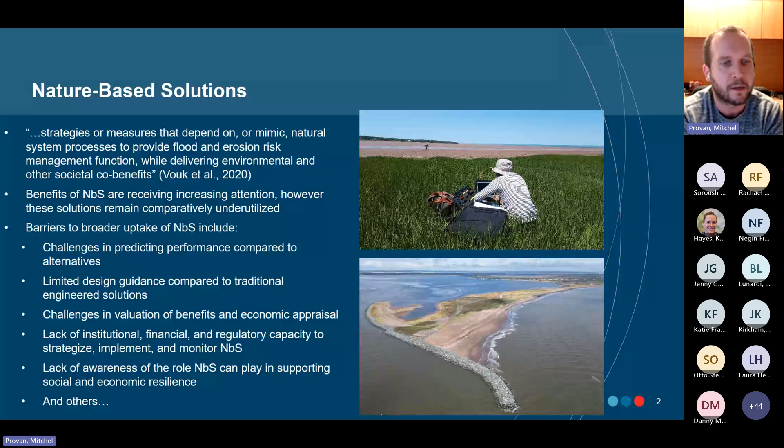Also, a lack of awareness of the role nature-based solutions can play in supporting social and economic resilience, and others. Where physical modeling can help is these first two. Physical modeling can help with these challenges of predicting the performance, as well as the limited design guidance compared to more traditional solutions.

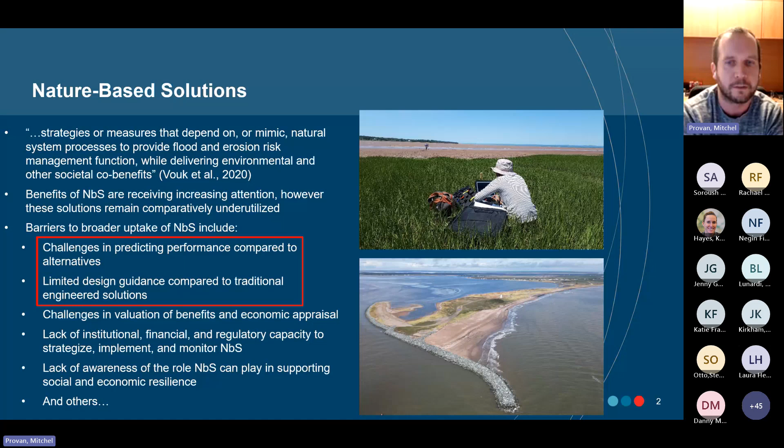Physical modeling, for anyone who may not be aware, is a tool that we use to simulate the behavior of water in order to study hydraulic processes and interactions in a controlled environment. This is typically done through scaled model representations of the system that's being modeled. However, some models are also conducted at full scale in certain circumstances.

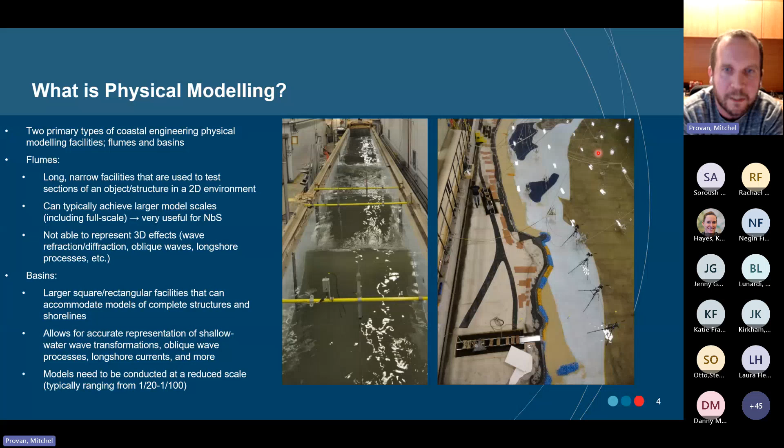Basins, which you can see just a portion of one pictured on the right here, are larger square or rectangular facilities that can accommodate models of complete structures and shorelines. It allows for accurate representation of the shallow water wave transformations, oblique wave processes, and longshore currents. However, the models typically need to be conducted at a reduced scale, which ranges from about 1 in 20 to 1 in 100. So just to make sure everyone's on the same page, when I talk about a model scale of 1 in 20, that means all lengths in the scale are reduced by a factor of 20.

So physical modeling as a tool to study. Since the modeling is conducted in a controlled environment, it's a great way to study and understand the performance and behavior of a variety of nature-based solutions. Hydraulic conditions, such as the water levels and waves, can be easily changed in a model, and the performance of the nature-based solution being tested can be studied under a variety of conditions. Extreme events can be generated, and models can be tested to failure at no financial risk.

In a physical model, you typically want to test to failure as you find the upper bound of the ability of whatever is being studied. Whereas, if you construct something in the field, even as a pilot study, you really don't want failure as it can be quite expensive to rebuild or repair.

And it's also much easier to measure data in a physical model and change the measurement locations based on observations. It's very quick to change the location of your instrumentation in the model, and you can do it in between tests and rerun the same test if you see you're not capturing that data. Whereas in the field, it's very difficult, if not impossible, to change the location of instrumentation during a large storm event because you don't want to be out there in the water during a large event.

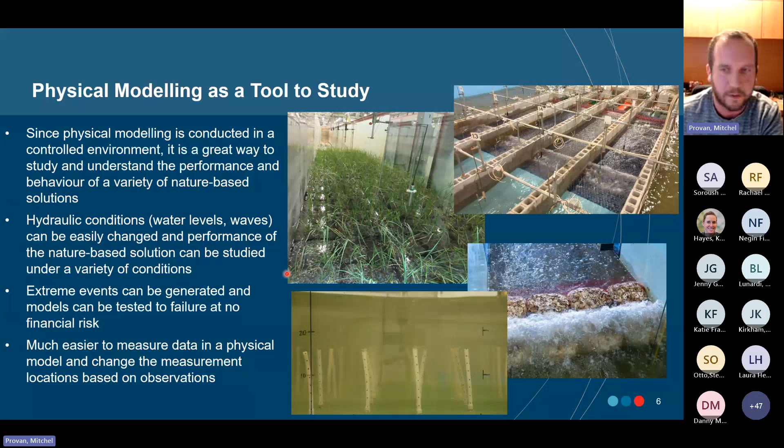So an example of using physical modeling as a tool to study is a study that we did here using coastal vegetation. Living shorelines are the most recommended nature-based solution strategy for low to moderate wave energy settings. They can help reduce the risk of flood and erosion in coastal areas through both increased bed elevations as well as providing resistance against wave propagation.

Now, there's been a lot of experimental studies done on coastal vegetation. However, the majority of these studies have focused on the wave attenuation abilities of mature and dense vegetation. There's a knowledge gap on the ability of immature or low density marshes during the earlier stage of marsh restoration or construction to attenuate wave energy.

And so we conducted a series of full-scale flume tests using live plant specimens that are native to the Atlantic Ocean here in Canada, but the similar study methodology can be carried out, and we have plans to carry it out for other plant species.

Just down here is just a sketch of the testing setup. So the waves approach from left to right. We installed a 1 in 11 grade here, and then a flat floor out in front. We had our experimental marsh, our model marsh, installed in here with a number of wave measurement locations throughout to investigate the wave attenuation as the waves propagate through the model marsh.

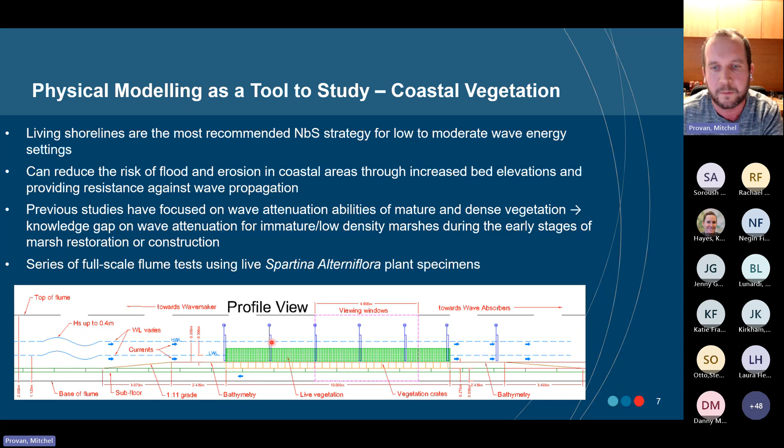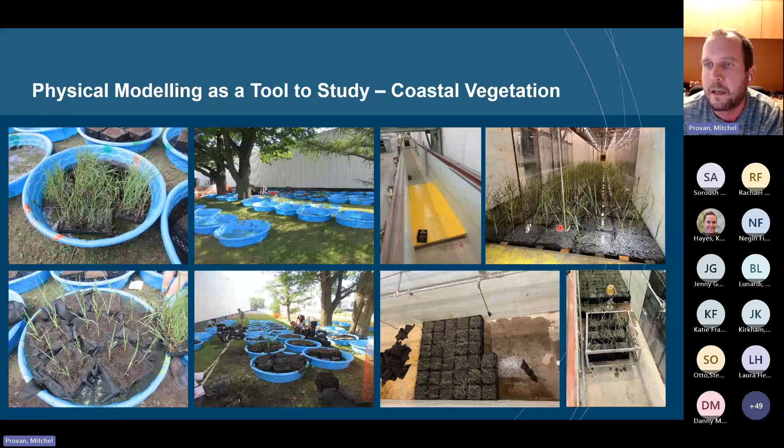You can see we also put a fine layer of gravel on top of the soil in the plants in order to reduce or mitigate the chance of erosion happening during the test, just to keep everything the same from test to test.

As I mentioned, two plant densities were studied. The lower density was 36 stems per meter squared, and the higher density was 81 stems per meter squared. We tested both regular and irregular wave conditions with wave heights ranging from 10 to 30 centimeters, peak wave periods ranging from 2.25 to 3.25 seconds, and water depths of 30, 60, and 90 centimeters.

We also investigated the interaction of waves and currents and the ability of the plants to attenuate wave energy. And so we tested with currents at 0.25 and 0.5 meters per second. Just a little video clip, nice clip showing the vegetation moving underneath the wave action, and just a few other photographs of the test in progress.

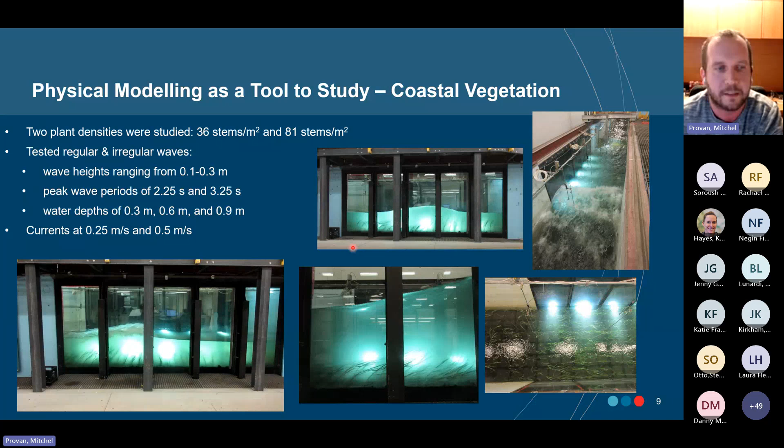I'm not going to go into a deep dive into the details of the results because there's just not enough time for it. So if you're interested, my colleagues did publish a paper that has a more detailed explanation of the results and the findings of this physical model.

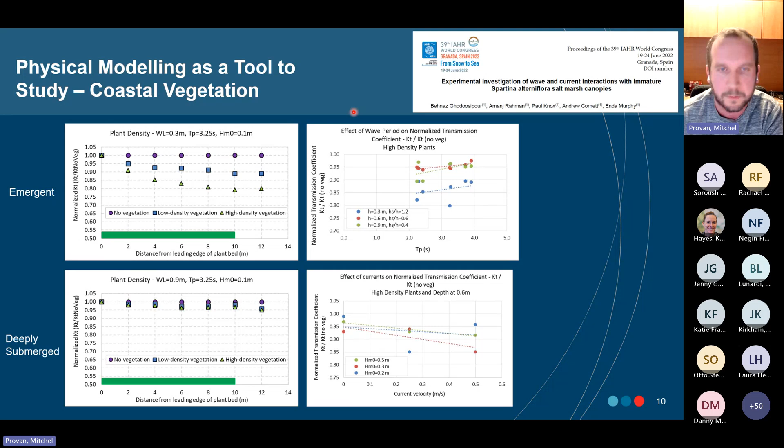So looking at physical modeling as a tool to optimize. Experimental tests or physical modeling allows for changes to the design of a shoreline protection scheme or any sort of structure, including layout, size, type of protection, among other factors. You can make these changes relatively easily. Now, the interaction of waves with the coastal structure is a very complex process and can be difficult to accurately model numerically, and design equations may not provide an optimized solution.

So, classic engineering design equations are usually based off of physical model tests, the majority of them, but they're more for general cases. Once you start designing structures in coastal environments, certain details in the bathymetry and the interactions of the waves with the shoreline and other structures can all change the optimum solution that can be found through design equations. It also provides the opportunity to reduce structure armor size and extent, and this allows us to find construction cost reductions and/or incorporate more nature-based solutions into the design.

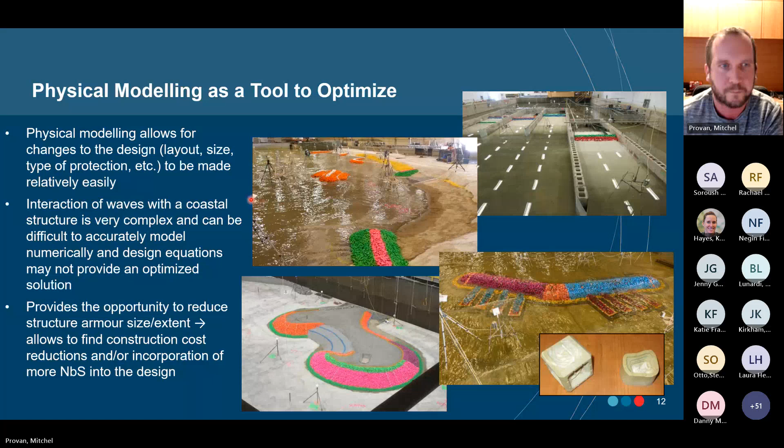So an example of using physical modeling as a tool to optimize that we've done is for the Jim Tovey Lakeview Conservation Area, which is a shoreline of eastern Mississauga on Lake Ontario, and it had a degraded quality of terrestrial and aquatic habitat due to current and past land use.

The goal of the larger project that we conducted the physical modeling study for was to create a new natural park that both established ecological habitat and public linkages, as well as an innovative use of clean fill from regional infrastructure projects. I just wanted to note this was a joint project from the Credit Valley Conservation, the Region of Peel, and the Toronto and Region Conservation Authority.

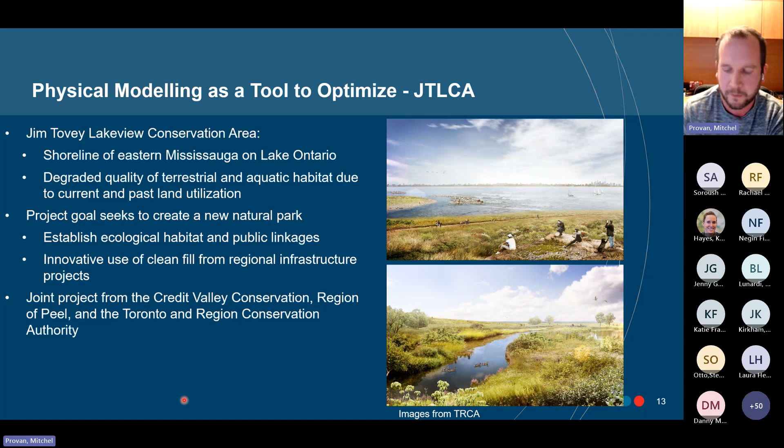There were 5 alternative designs, 4 of which included the headland bay configurations that you see here. The preferred alternative that we tested and helped optimize in the physical modeling study was called Island Beach C, and you can see a schematic of it here.

This alternative included about 1.5 million cubic meters of fill, a headland with an armor stone revetment around it, which is outlined in red, about 1 kilometer of cobble beaches, which you can see in yellow here, 3 offshore islands with the blue arrows on them, a terminal groin at the end to anchor that cobble beach, as well as 2 creek outlets with the green arrows here.

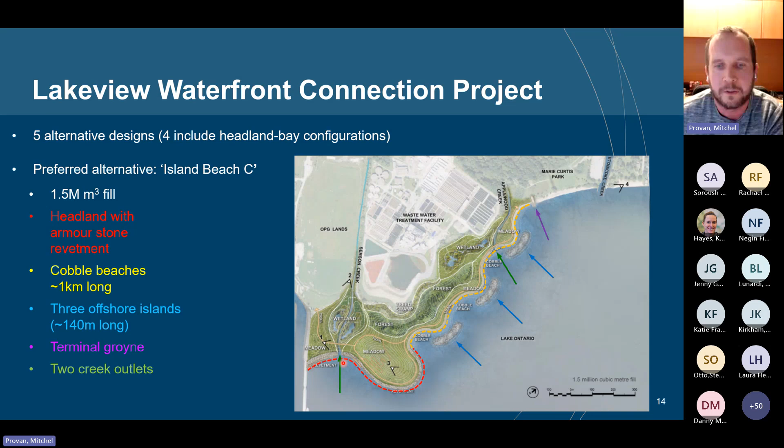In order to support the design of this, a 1 to 35 scale physical model was conducted in NRC's large area basin. I just want to note that this was done in partnership with Shore Plan Engineering, who are the design engineers for this project. The physical model was used to verify the stability and response of the headland beach system under a range of wave conditions, as well as optimize the project design elements, including the beach fill and rubble mound structures.

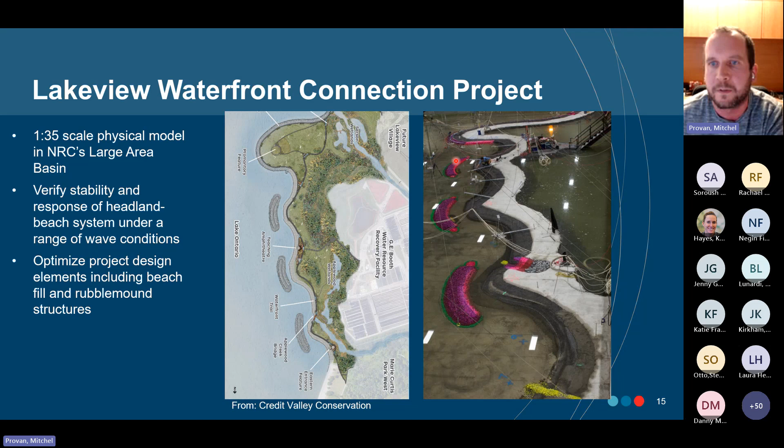I have a schematic of the shoreline here, and you can see a similar view from the physical model matching up nicely with the schematic. These are a number of photos from getting the physical model built. We typically represent all the bathymetries out of concrete, because it gives us a hard, stable surface that remains unchanged in between tests, so you can directly compare one test to another. So we have our technicians working hard, placing the concrete and then finishing it.

This is the wave calibration. Prior to any physical modeling study, before you actually start building the structures and testing them, you do a series of wave calibrations where you make sure that your wave machine is producing the waves that you want. That's done before any of the coastal structures are constructed. Here's the technicians building that long cobble beach along here, finishing it off, and then building these more offshore rubble mound structures, as well as the revetment.

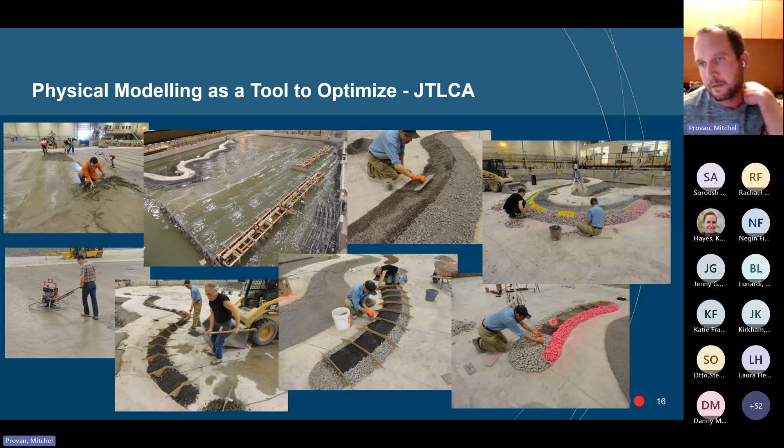One thing that we try to do in the physical model is to replicate as closely as we can the construction methods behind the offshore structures to ensure that the interlocking between stones is similar between the model and real life. So things like the cobble revetment are all shovel placed, because in the real world you have a big excavator or backhoe placing that material. All the actual armor stone is hand placed stone by stone. We don't just shovel it into place. We place it one stone at a time to get similar interlocking to what you would see when it's constructed in the real world.

Just a few photos from before, during and after testing. Again, I won't get into the specific results here, but there is a paper published by my colleague Scott Baker with the information up here in the top right. Over here is a nice shot of the waves interacting with the shoreline scheme with the various islands and the different beach cells. The physical model was used to investigate its performance and provide some ability to optimize it.

This is at the end of one of the revetments. You can see a bit of a scour hole forming here. That was altered in the next design step and retested to ensure that something could be done to eliminate that scour hole. We looked at erosion and deposition trends of the cobble beach, making sure it's eroding where the designers want it to erode and accreting where they wanted it to, the reshaping of the cobble beach and the profile that it takes on, and the interaction of the waves with these more offshore rubble mound structures.

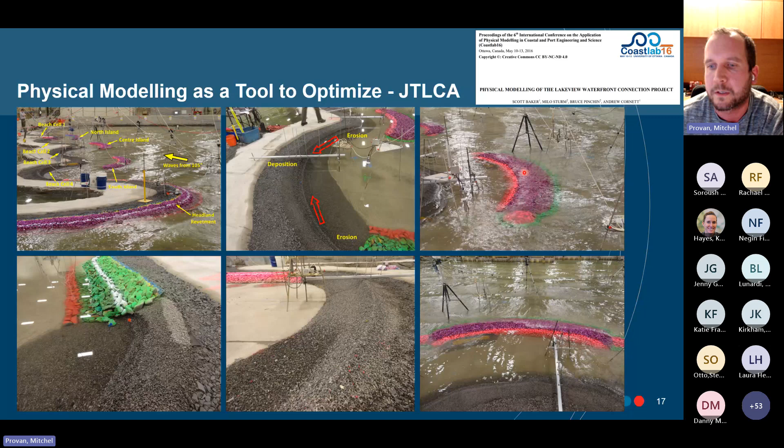The study itself generated a large quantity of data used by the design engineers to further optimize and finalize the design plans. And then optimizations were achieved through the physical modeling study, and they led to significant cost savings for the overall project. Compared to the EA cost assessment, there's savings of approximately $3 million, which is more than 10 times the physical model study cost.

So while physical modeling can be fairly expensive to undertake for a project, it can definitely pay for itself many times over through optimizations. This is my colleague Scott Baker working on the model here. This was a study that he was running. I believe a lot of the cost optimizations came through a reduction in the crest elevation of these structures, allowing to use less material, and then leading to some of those cost savings.

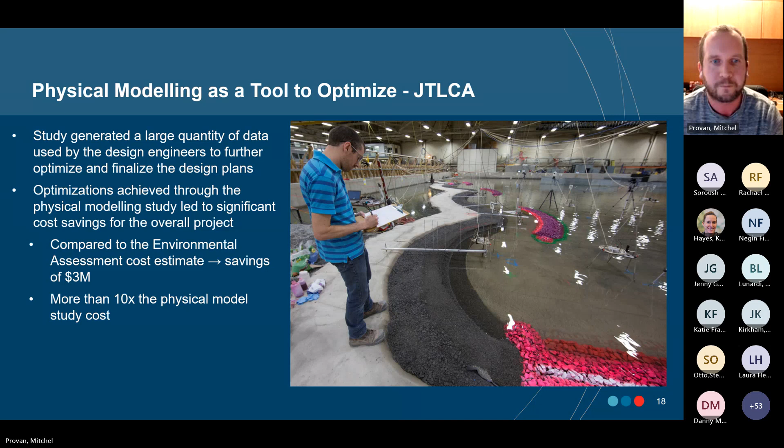Another example, and this one's not yet happened, so I don't have any nice model pictures to show from this one, but this is for the Hillman Marsh on Lake Erie. This is an upcoming model study we'll have starting next spring. So we're excited to undertake this one with Seth Logan at SJL Engineering.

The Hillman Marsh is located on the eastern side of Pelee Peninsula, and it's a provincially significant wetland. It's historically featured a protective barrier beach over 1.5 kilometers long, which would shield the marsh from the potentially large waves of Lake Erie. A breach occurred in 2017. Here's an aerial photograph from 2017. You can see that breach here in the barrier island.

And it rapidly expanded in the following years due to high lake water levels, increased wave exposure due to vertical downcutting, and obstructions to the natural longshore sediment transport. So you can see that breach initially formed 2017. 2 years later, it's widened. Another year, it's really broken open.

And by 2022, you have a large breach in the island, this big sand spit that's developed and starting to encroach in the wetland behind it. And it could potentially cause a lot of issues with wave-induced flooding to the lands inside that marsh if it's fully exposed to the potentially large waves of Lake Erie.

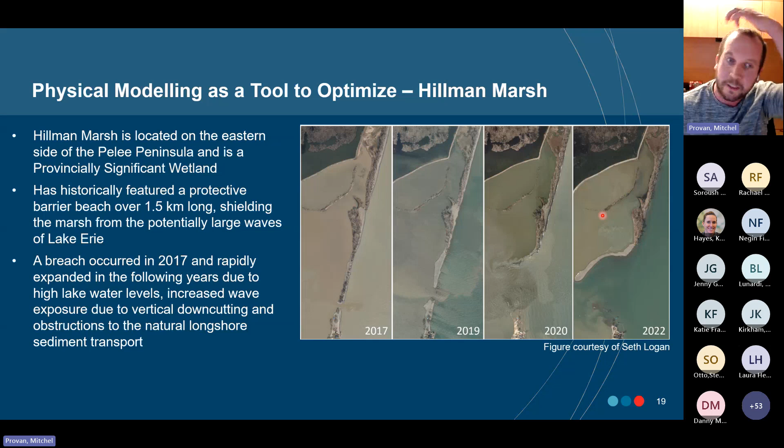So the design work is currently underway with preliminary designs, including a gray-green approach with a combination of new barrier beach, buried rock berms, submerged rock shoals, and new fish habitat. This is just a schematic provided by Seth Logan. And this isn't the final design. This is just a preliminary design to show some concepts that could be included in the overall

rehabilitation project. And we'll be looking to test once the designs are further along and ready. We'll be ready to test it in spring 2025 to support the optimization of the coastal features and confirm that the final design will deliver the desired levels of performance.

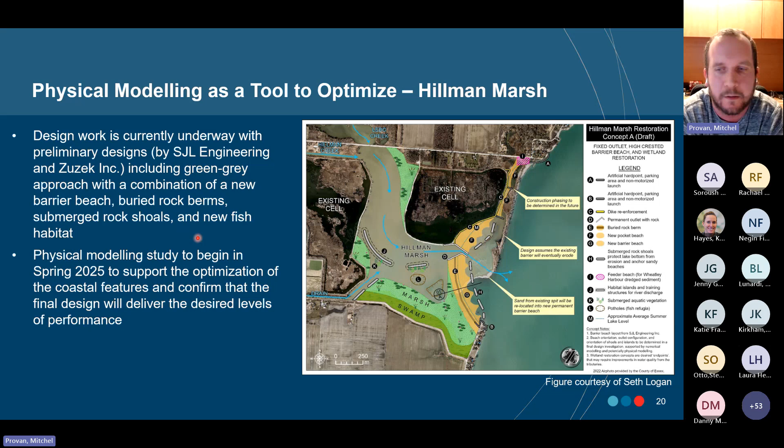And the third one here, using physical modeling as a tool to de-risk. Physical modeling provides the opportunity to reduce project risk before construction. It allows to investigate the stability of various design elements and protection of critical infrastructure, and can also, in some circumstances, investigate potential maintenance-related issues and reduce the risk of expensive future maintenance of a coastal infrastructure project.

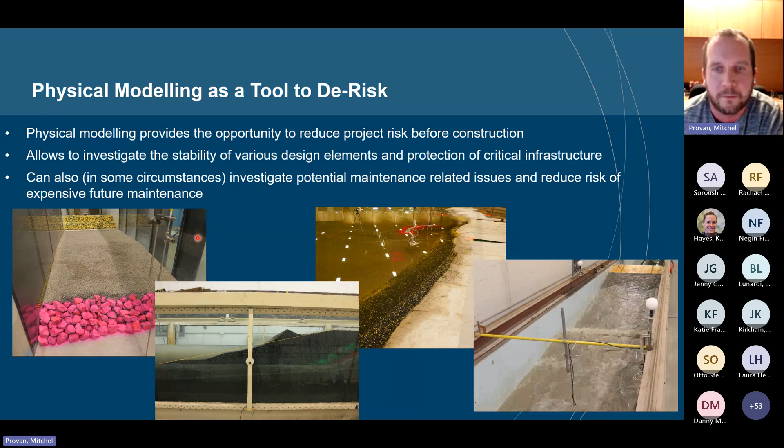So one example of that here is the Morgan Shoal dynamic revetment. Historically high water levels on Lake Michigan in 2020 resulted in wave-induced damage and localized flooding along portions of the Chicago waterfront, including South Lake Shore Drive. You can see a nice photo of it here.

Here's the large waves crashing against the shoreline of Lake Michigan near Chicago, starting to overtop the structures, causing some flooding along this pedestrian pathway. And you can see the cars driving along South Lake Shore Drive, not too far inland from where the flooding is starting here. And some post-storm damage.

Here's that same little shed or hut there. You can see it's damaged the pathway. It's thrown up a lot of larger materials onto the path and damaged a lot of these placed armor stones, or armor blocks, I guess, along the shoreline here.

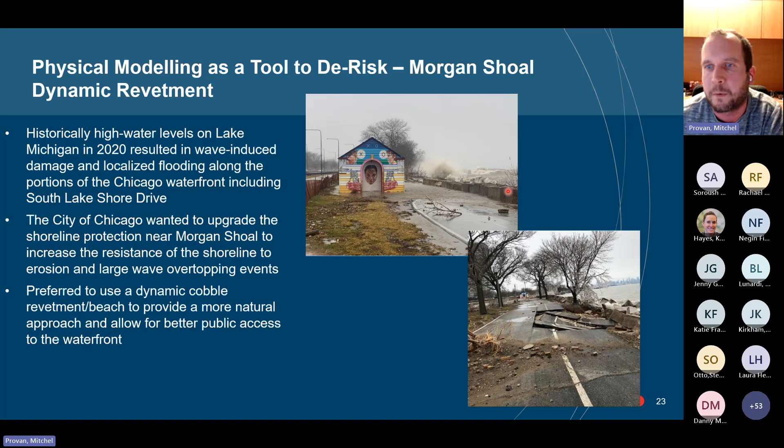So the city of Chicago wanted to upgrade the shoreline protection near Morgan Shoal, both to increase the resistance of the shoreline to erosion, as well as increase the resistance to large wave overtopping events. The preferred design was to use a dynamic cobble revetment or beach to provide a more natural approach and allow for better public access to the waterfront. Right now, the access to the waterfront is not great with these large blocks here, and they're looking to improve that for the public use.

The initial designs for the dynamic revetment were conducted using numerical models and equations. However, in order to gain a better understanding of the complex wave interactions with the dynamic revetment, we conducted a large 1 to 10 scale physical modeling study in our large wave flume. And the main focus was reducing overtopping and potential future maintenance of the dynamic revetment.

So a few photos of the kind of post-construction and pre-testing. So you can see those large blocks they wanted to repurpose, that people will be able to access this kind of nice, larger dynamic revetment or cobble beach on. And it's just another photo of a different model setup for the same project.

It's important to do these type of studies at a large scale. So 1 to 10 is fairly large, especially compared to the 1 in 35 of the previous project we just looked at. Mainly because a lot of these dynamic revetments like to use rounded material, mainly because it's nicer for people to walk on compared to normal crushed stone or angular material. And this rounded material, you can only get it so small.

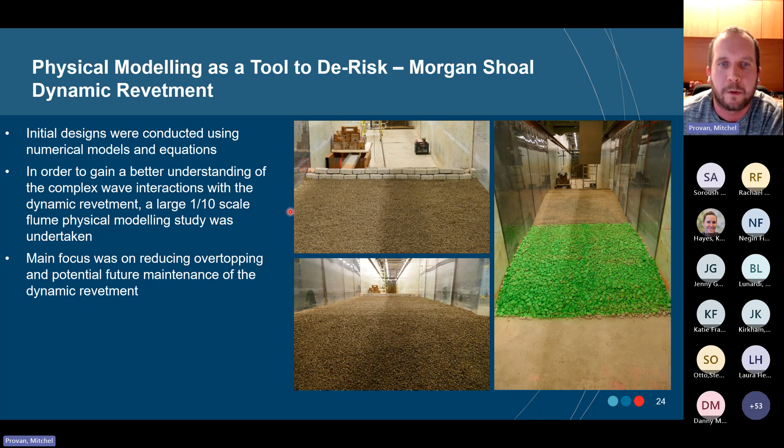So in order to get similar kind of material interactions and sediment transport, you want to use a similar type of material in the model as you would have in the real world. And so you can see this kind of nice rounded material that we're able to get that was appropriately scaled and hopefully provide a very good representation of how the dynamic revetment would actually perform under the tested conditions.

So we ran quite a few designs through a large range of wave and water level conditions, and the physical model study was able to help reduce potential maintenance costs, mainly post-storm reshaping of the dynamic revetment. So on the right here, I have a plot. This is basically distance offshore of the revetment, starting from the land side to the offshore side, wave directions from right to left, and then you have elevation on the y-axis. And you can see we did a number of test series here. I measured the profile and the reshaping.

And so, initially we're getting these large kind of berm formations where the initial crest of the structure was down here. So, things were getting almost like 8, 9 feet high. And so our client that we're working with, it has large maintenance costs having to reshape that after a large storm event. Eventually got it down to the orange here, which is a little bit smaller, kind of helping that. You might look and say, well, this gray one's even lower, but this one was actually a failure that you see here.

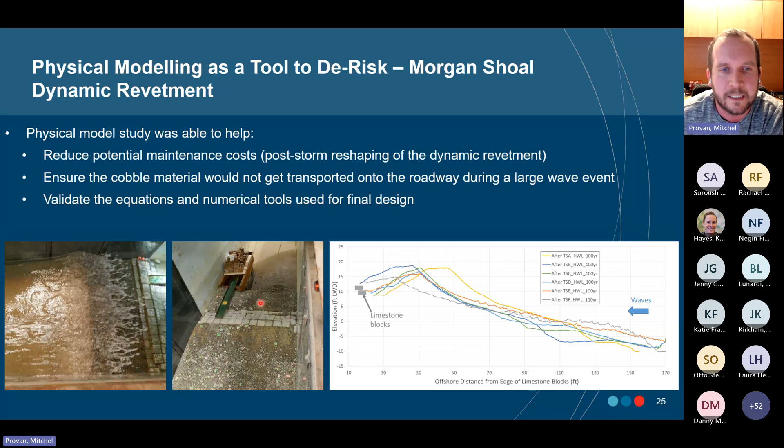Now, one of the things that the physical model study was able to help look at was ensure that the cobble material would not get transported onto the roadway during a large wave event. So this photo here, as you see all this cobble material that got transported over those blocks and away from the shoreline, that matched up with this gray one here. So it looks good, but actually didn't perform very well. And I should note that these cobble materials scale in the real world to 3 to 9 inch cobble. So you can imagine you don't want these things getting flung around during a large storm event.

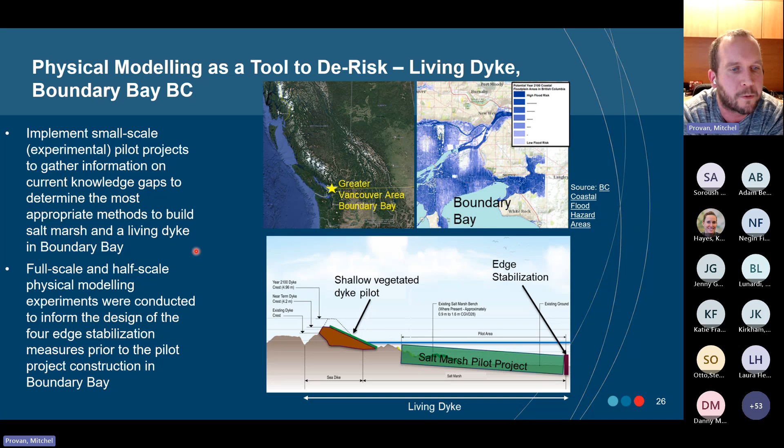And so what we helped them do was do full-scale and half-scale physical modeling experiments to inform the design of 4 different edge stabilization measures prior to the actual pilot project construction in Boundary Bay. So we tested these 4 features. One was a natural sand berm. This is looking towards the shore from the offshore direction. It's just a slope up to the salt marsh here.

One thing I should note is that we didn't actually model the vegetation. We just looked at the sediment that would be placed in order to facilitate the growth of the salt marsh. And then we figure if that remains relatively stable, then the vegetation will have a good chance of becoming established.

So we did a natural sand berm at full scale, a rounded gravel berm at full scale, a berm consisting of oyster shell filled bags, so empty oyster shells placed in bags. And then the brushwood dam was done at half scale, mainly due to just height restrictions in the flume. And the brushwood dam itself is just these vertical wooden posts with some bundles of brushwood or sticks in between them that are fastened down over top with some biodegradable rope to hold it all down.

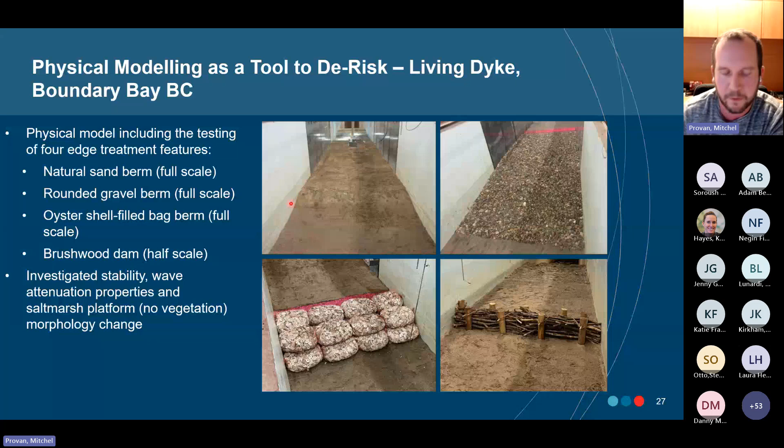So the study investigated the stability, wave attenuation properties, and the morphologic change to the salt marsh platform with no vegetation. Again, not going to get into the details of the study. There's a paper with the details up here if you want to have a better look into the study results. But we essentially looked at wave attenuation results, going from offshore to onshore for the 4 different edge treatment features, as well as the salt marsh platform change results. So this is elevation for the 4 different features, the 4 colored lines, as you move towards the land here.

And just some photos of before and after the large wave events that we tested. You can see a scour hole developing on the downwave side of the oyster shell berm here, some scour around the brushwood dam. And this is a video of some large waves interacting with the rubble mound structure. So you can see them breaking over top. All this darkened area that you see down here, that's all sand being entrained in the water column due to the breaking waves and transporting that sand.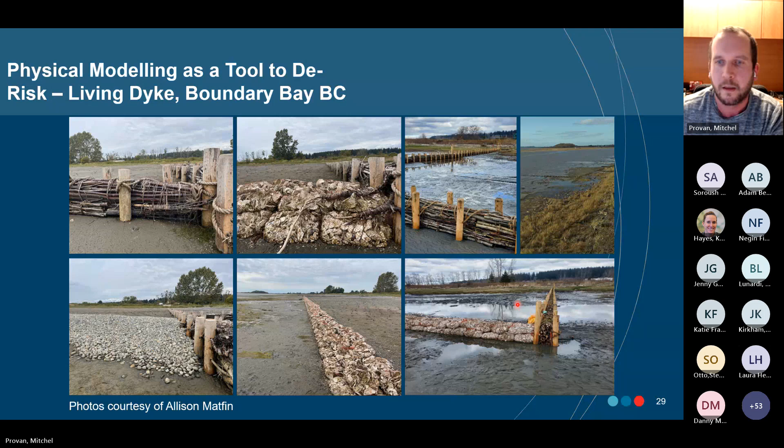Now, I spent the last, about half an hour talking about how great physical modeling is, but even a full-scale physical model is still a model. So there's a number of processes that can't be represented either feasibly or easily in a physical model. And Mother Nature can be cruel at times. And so this pilot project gave great information on how these various edge treatment features and salt marsh planting reacted under real-world conditions.

So one thing that was found was during winter, ice would freeze up in the bay during the colder days in Vancouver or near Vancouver. And then the tide would come in and actually lift that light ice up. And that ice would take all that nicely planted vegetation with it. So that removed a lot of the vegetation within the pilot study.

And then just recently, a few weeks ago, project partners went out to look at the site and noticed this very large tree with a big root wad. You can kind of see that tree again down here. That just came through and destroyed a lot of the oyster shell bags, cutting them open. You can see the oyster shells dispersed all amongst the plot here. Not too much vegetation really around. You can see little plugs of it around.

And then also the brushwood dam. Originally, this was all nice and filled with those bundles of sticks, but I guess the rope that was holding them down got severed either by a large storm or maybe some driftwood. Cut that rope as the tide comes in, lift all that brushwood out, and now you're just left with these vertical posts. So the study's still ongoing.

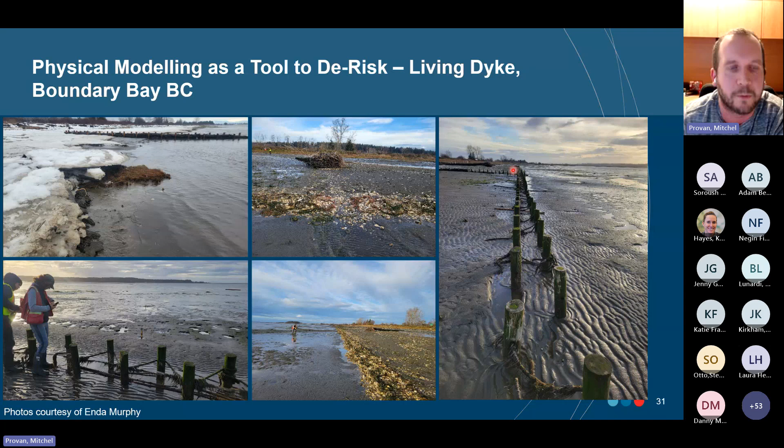In conclusion, physical modeling can be a useful tool to learn more about nature-based solutions before implementation. It can be used to help optimize the design to reduce costs or investigate methods to minimize potential maintenance. However, as I just discussed, all models need to make assumptions and simplifications. Therefore, there's still a big need for pilot projects and field implementations in order to investigate how nature-based solutions can perform under real-world conditions. And the exciting part is there's still lots to learn in the world of coastal nature-based solutions, and it's a fun kind of work to be around and to be able to participate in.

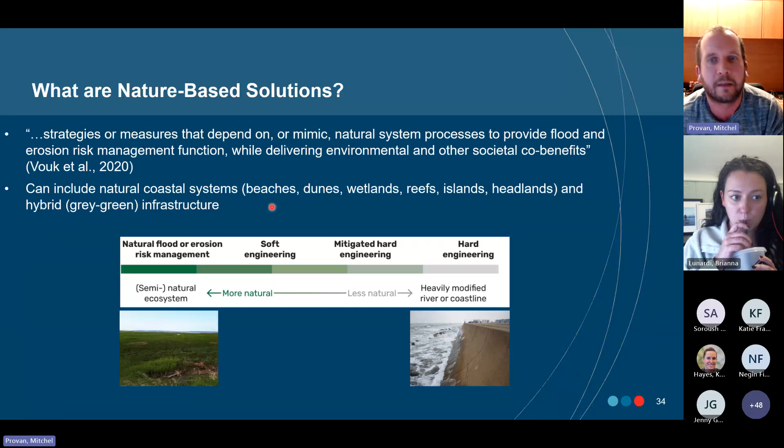I didn't include this slide out of time. But the big thing for scaling a physical model is to establish similitude between the model and the real world. And there's three types of similitude that need to be kept in mind. There's geometric, which is basically the dimensions, the length, width, and height of the object you're trying to model. There's kinematic, which incorporates velocities and accelerations. And there's dynamic, which is the pressure, inertia, and gravity.

Now, since all physical models use water, because it's just not feasible to use a different fluid in the quantities we require, you can't keep the Froude number and the Reynolds number the same when you're doing a scaled model. Just a reminder, the Reynolds number is the relationship between the inertial force and the viscous force. So where the Froude number is inertial and gravitational, the Reynolds number is inertial and viscous. And since water is used in full scale and in the model, you can't scale this viscous force.

And so it's important to keep the model scale as large as possible, in the order of 1 to 20 or 1 to 30, as opposed to 1 to 100, because that keeps the Reynolds number as large as possible in the fully rough turbulent regime, and it mitigates the scale effects. If the model scale is too small, you can get into issues with viscous forces and surface tension, especially when looking at waves breaking. If you have too much surface tension, your waves just won't break properly, and it'll be hard to generate those small waves as well. So a larger model scale is always better to keep that Reynolds number high.

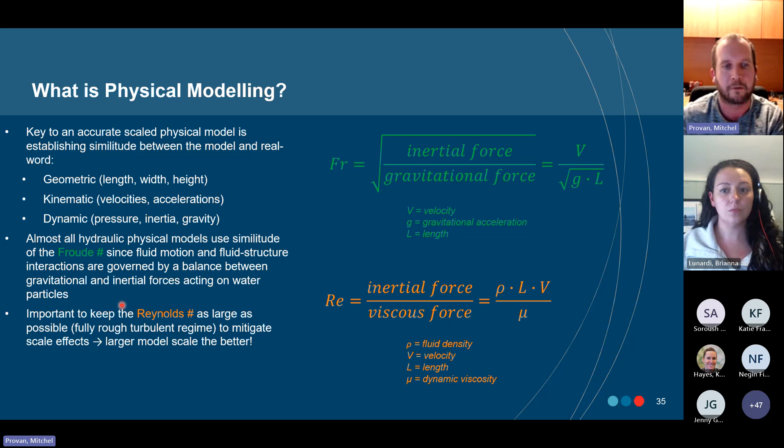Great, thank you. I do have another question here for you. What was the timeline for the pilot study in BC? Is this the last step in modeling before broader implementation, or will there be iterative numerical or physical modeling after that pilot? Yeah, so we did the physical model in the summer of 2022. It was constructed shortly after, I believe, and it's now been left for about two years.

And then during that time, a PhD student and Professor Ryan Mulligan at Queen's University have been conducting some Delft3D numerical modeling of that same site. And then Professor Ryan Mulligan also has a master's student now who's just starting up to do some additional modeling to help with that larger implementation within Boundary Bay. And then the City of Surrey will have their own decision making to do on how much they can do at this stage and how they want to approach it. But those next steps are starting to be looked into now.

Great. Do we have any other questions from the audience here? I know you went through a lot of questions there, Mitch, so I appreciate you taking the time to answer those. I do see one coming in. They might have missed it, but can you please elaborate more on the downscaling method, distorted method included?